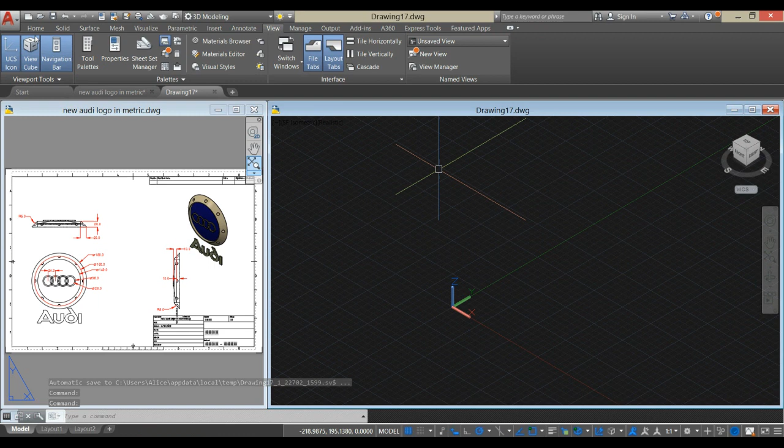Before we get started, make sure the setting on your status bar matches with mine and check these highlighted icons. And the template I'm using is acadiso3D for metric units. Let's start by bringing your drawing to front view. Type C for circle command, click anywhere on the screen, type D for diameter option, and enter 180 millimeters.

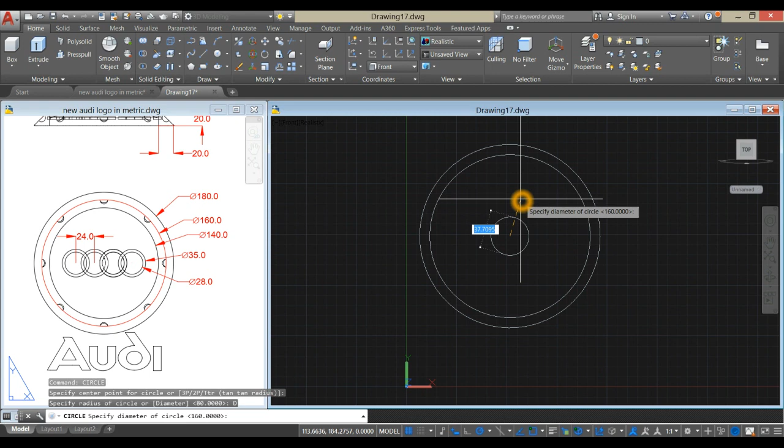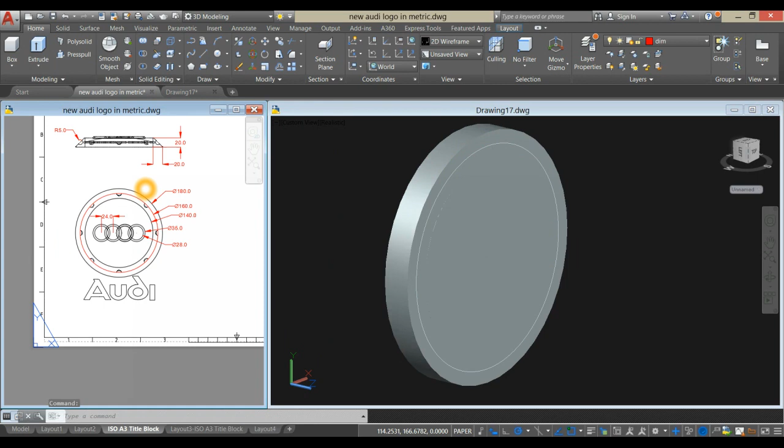The next circle, locate center, type D for diameter option, and enter 160. Right click to repeat circle, locate center, type D for diameter option, and enter 140 units. I'm just going to turn off the grid. Extrude these two circles. Go to the ribbon, select extrude command, and extrude it for 20 units, which is the thickness of this circle.

Select subtract command from the ribbon. Click the object you want to keep, right click and select that object inside to remove it. Go to solid, chamfer edge, and go down to the command window, click distance option, and the first distance is 20 units, enter, which is this one here, and the next distance, which is this one, is also 20, and select the edge, enter twice.

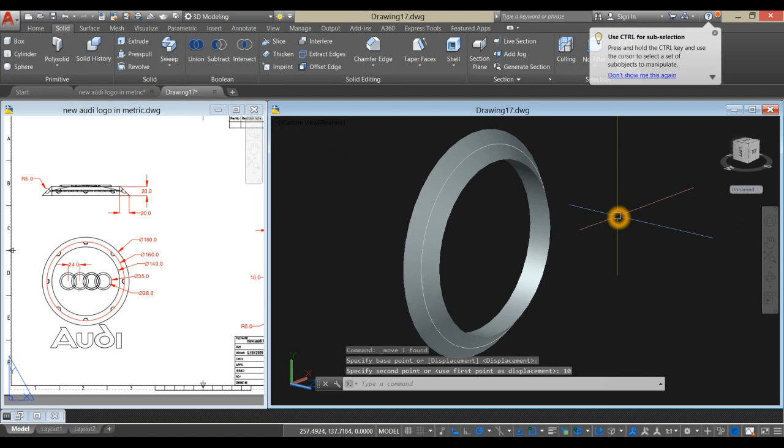Move this circle, which is our guide for creating the holes, move it for 10 units towards the center. Bring your drawing to front view. I'm just going to change this to wireframe. Select sphere from the ribbon, locate quadrant, and enter 5 for radius, which is this one here.

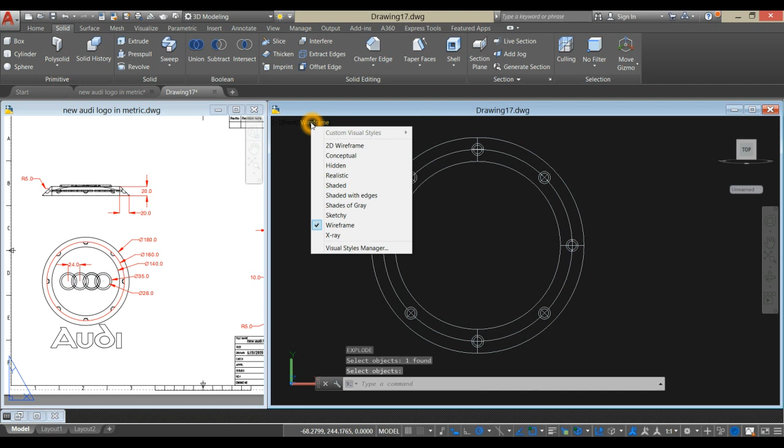Type array and select array polar. Click the object, specify center of array, go up to the ribbon and change the number of items to 8. Enter twice. I'm going to explode these spheres. Type X for explode command. I'm going to change this to shaded with edges. Go back to the ribbon again and select subtract command. Click the object you want to keep, right click, and select the spheres.

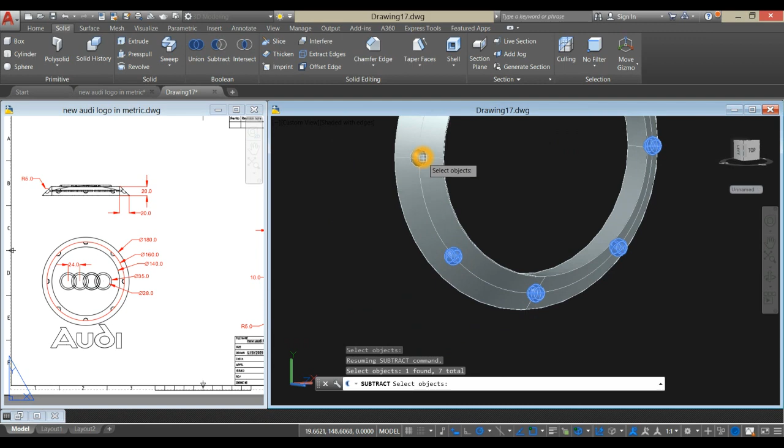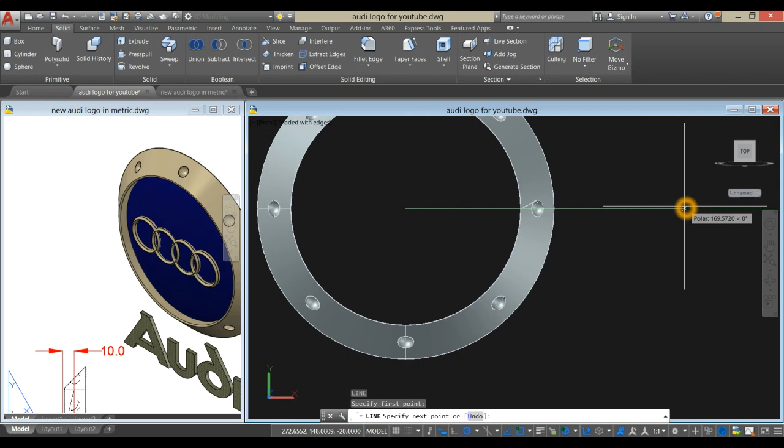The next thing to draw is this blue colored concave face. I'm just gonna bring this to front view and draw a line, maybe from here. It's just a guide so that my drawing won't be overlapping. I'm gonna hide this one, click, hover over isolate, and click hide object. Let's move on to the next one.

From front view, draw a line. Type L for line command. The distance is 140. I'm going to start from 70 and bring down your line for 140. I'm just gonna delete that. The distance from the midpoint of the arc perpendicular to the line is 10. So line again. From midpoint, bring your cursor to the right for 10 units. Go to the ribbon and select 3-point arc. Start from here.

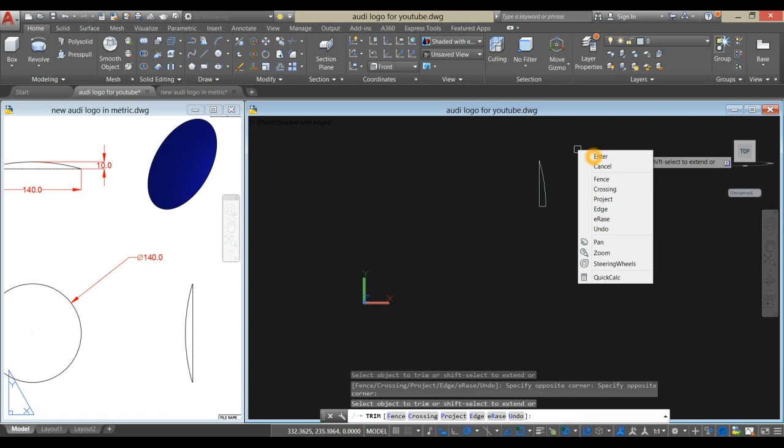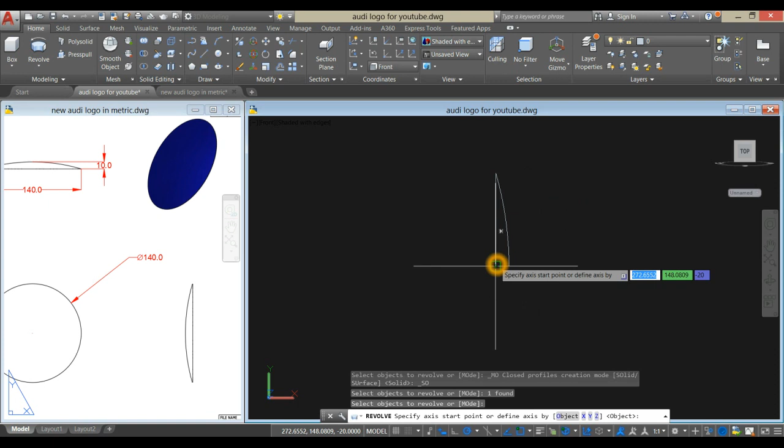Type TR for trim command. Double click and remove that. Type join command by typing J, enter, and select the segments. Now it's one object. Use revolve command. Click this object, enter, and start from that endpoint to this endpoint and enter 360 degrees.

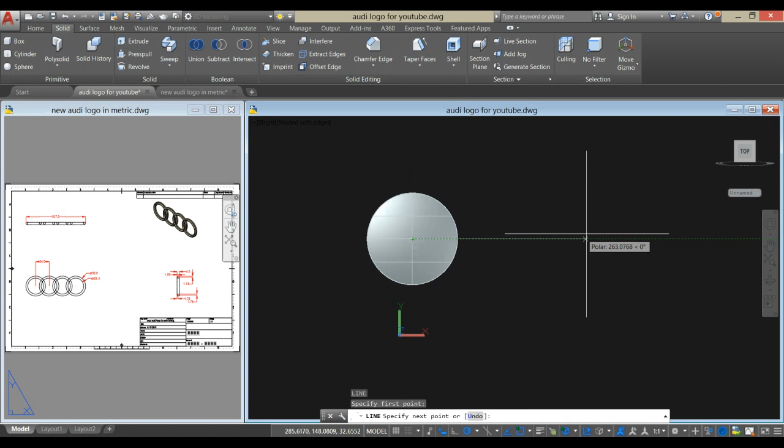Now let's move on to the next one, which is the circles. Draw a line again for guide. So type L for line command. And from the center, maybe about that distance, click this object, hover over isolate, and hide. Type C for circle command. Click the endpoint, type D for diameter option, and enter 35. Right click to repeat circle, D again for option, and enter 28. Just gonna erase that.

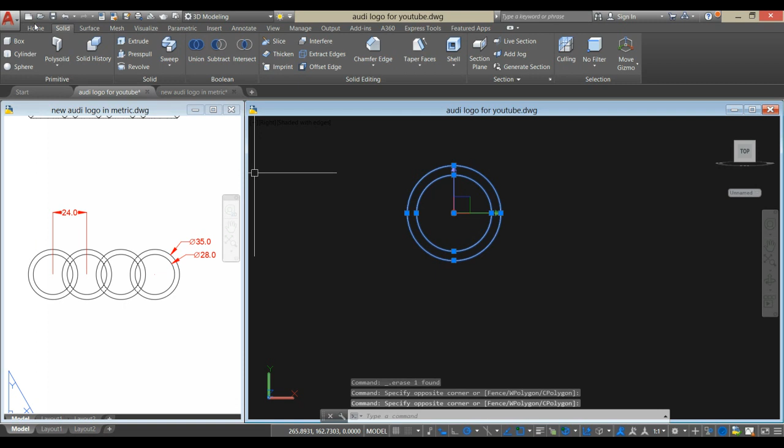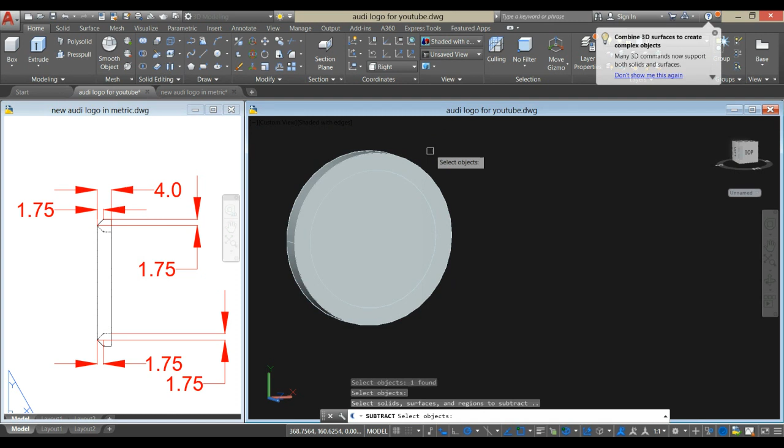Extrude these two circles for 4 units. Subtract command from the ribbon. Click the object you want to stay and click the object you want to remove. Go back to solid, select chamfer edge, and the distance of the chamfer is 1.75 by 1.75. So select first distance from the command window and enter 1.75. Enter and 1.75 again. Click this edge. Enter twice. Right click to repeat chamfer edge and click this edge here.

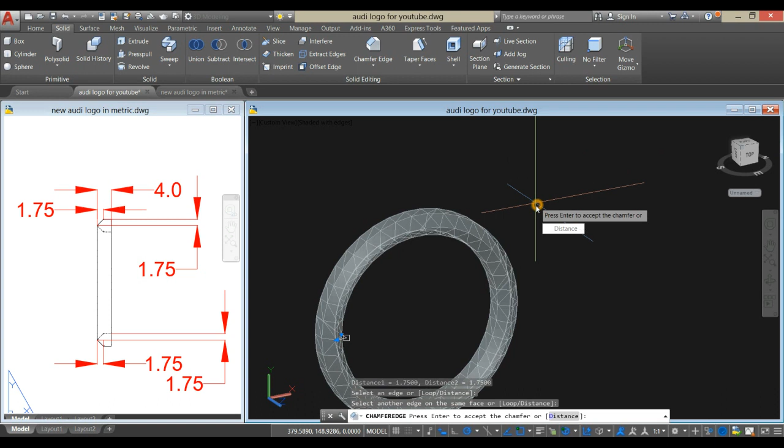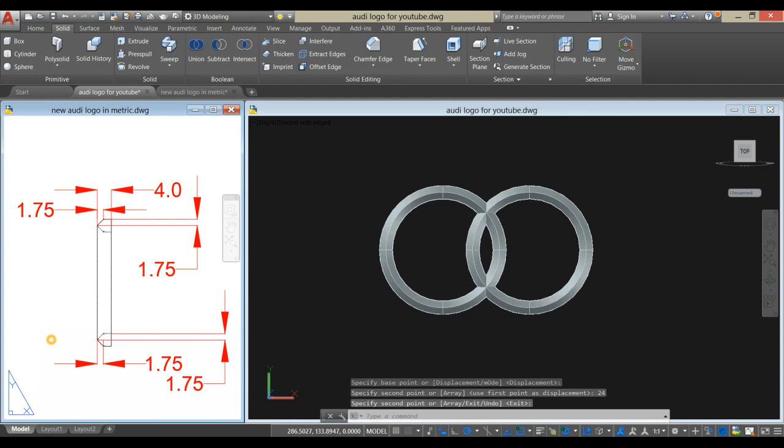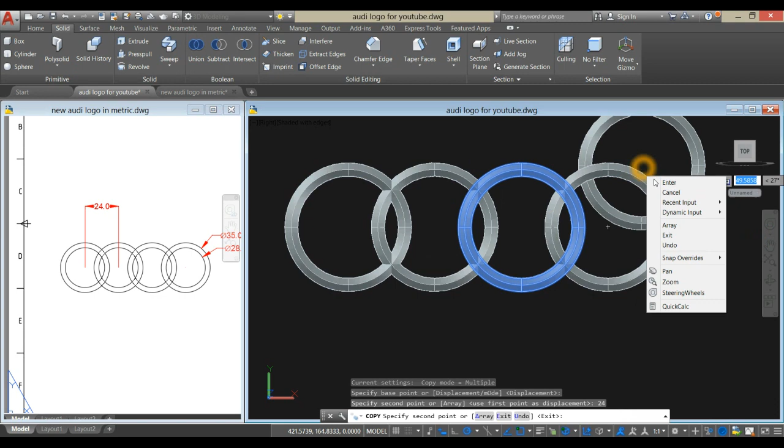Alright, bring this to right view. Copy. And from the center for 24 units, which is this one here. Copy again for 24. And 24. Now our circles are done. The next step to do is the 3D font.

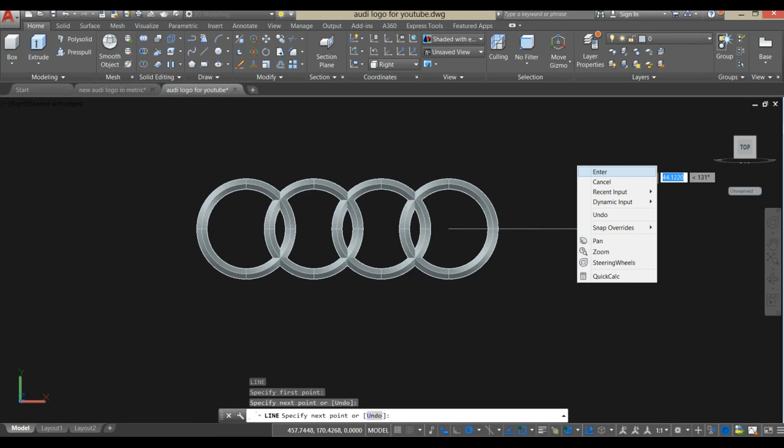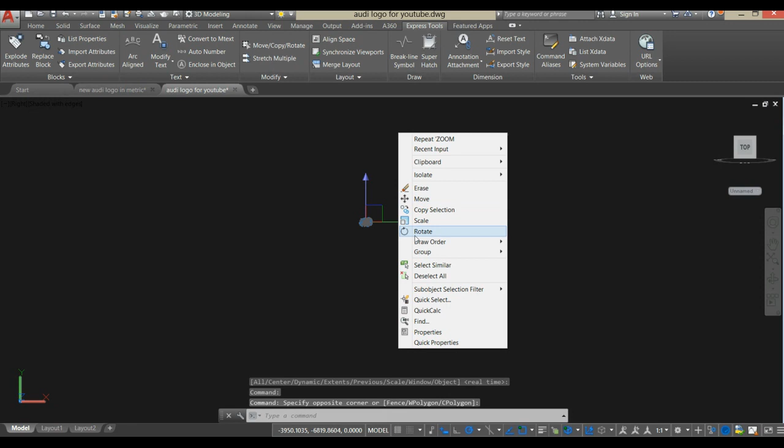Type L for line command. Hide these circles, isolate, and hide objects. Go to annotate, select multiline text, and type AUDI. Go to Express Tools, and beside Modify Text, click this drop-down arrow and select Explode. Select Zoom Extents and look for that exploded text. Move it back. I don't know why it moved somewhere else.

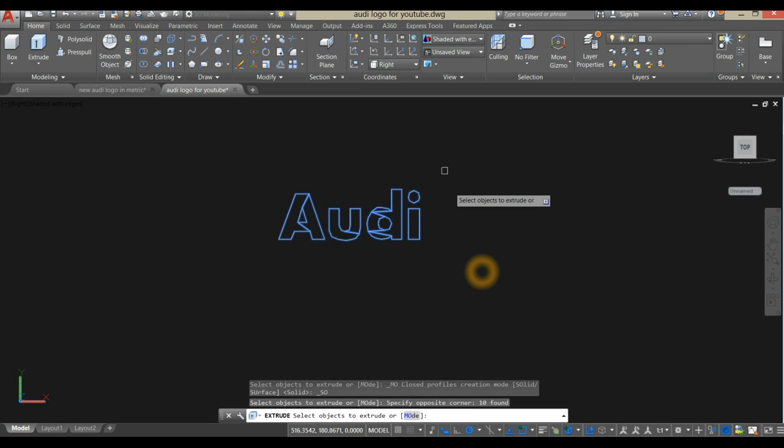And move it near the guide. I'm just gonna erase this one. Go to home, extrude the text for about 5 units. Now I'm gonna combine all the text. Now it's one object. Right click, hover over isolate, and end object isolation. The next step is to combine all the parts.

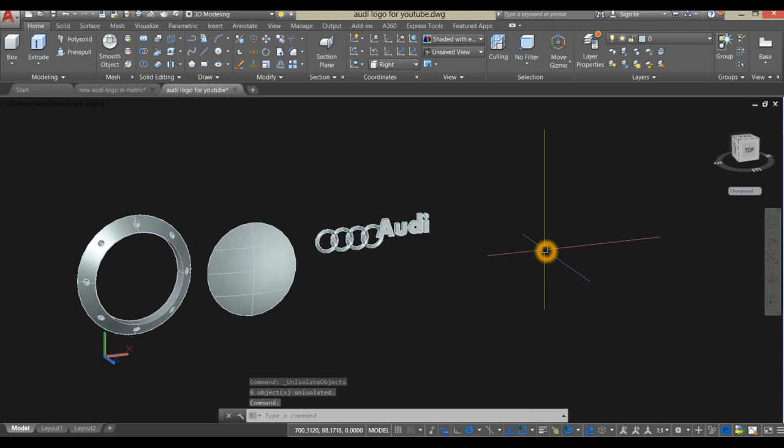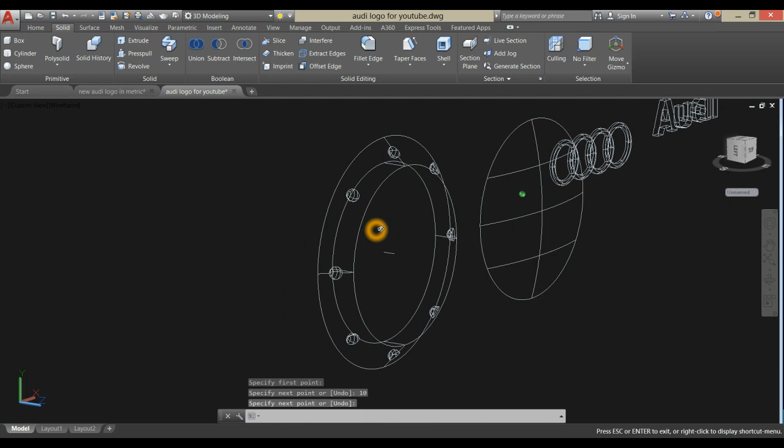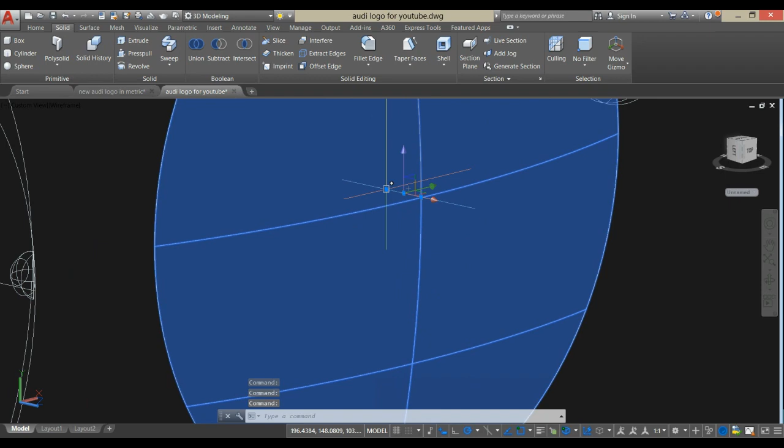I'm going to change the visual style to wireframe. And draw a line as a guide from the back of this drawing towards the center for 10 units. And attach another line from the center of this hemispherical shape towards the center for another 10 units. I'm gonna grab this one, including that guide, move it from the end point to the end point here.

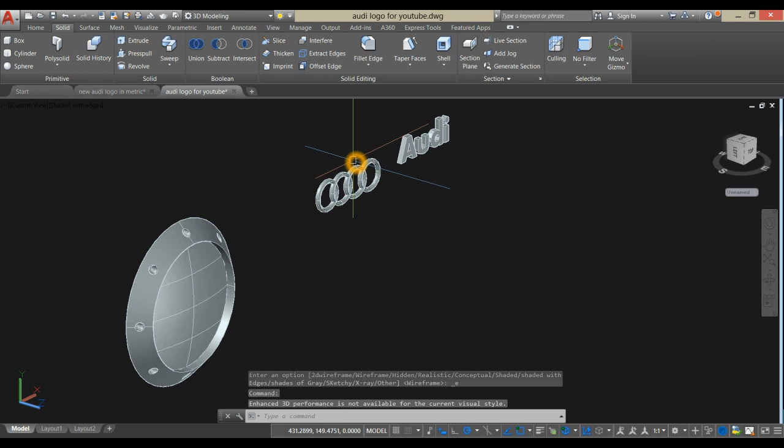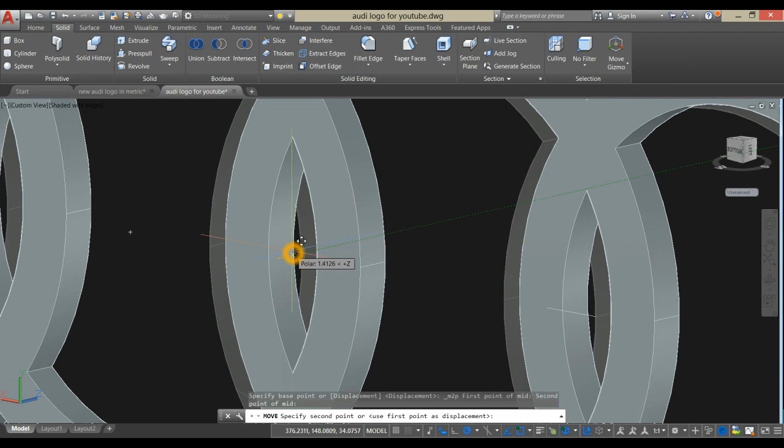I'm gonna check it with shaded with edges. Looks okay. Now I'm gonna combine all these 4 circles by using union command. Now it's one object. I'm gonna move this one, shift right click, mid between 2 points. I'm gonna grab the midpoint from these 2 points and attach it to the end point of that line. Just gonna erase that. I'm gonna move this text at the bottom, left view, no, maybe front.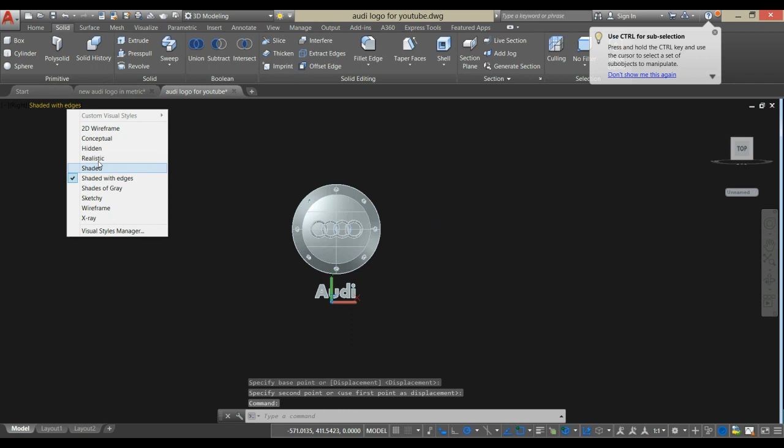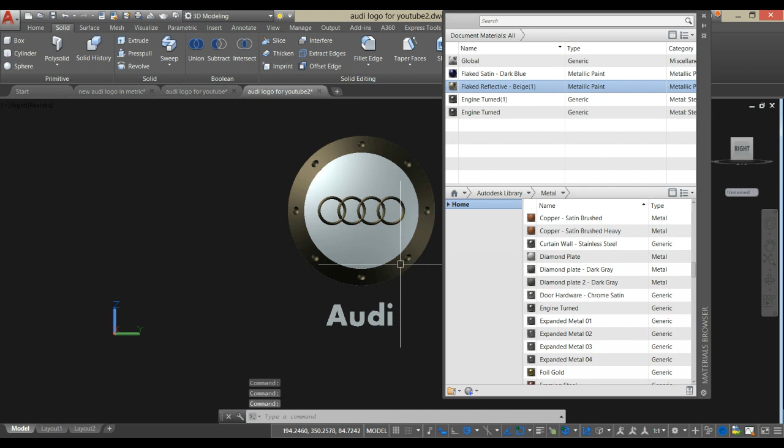Change this to realistic. The next thing to do is to apply materials. Type materials. Apply flaked reflective beige for this one too. This one for flaked satin dark blue, and this one for engine turned.

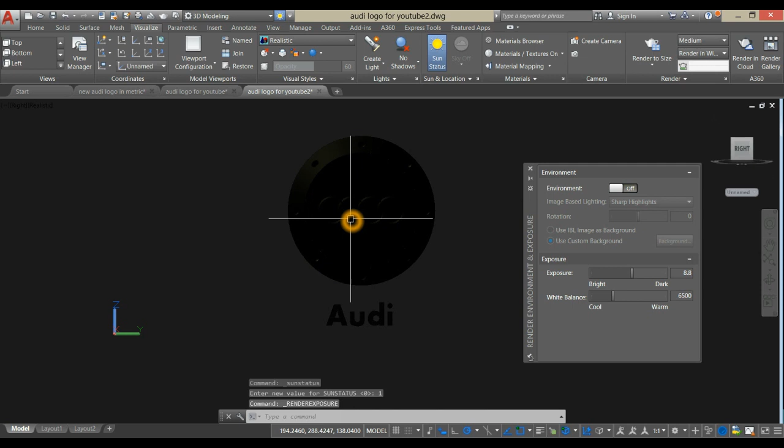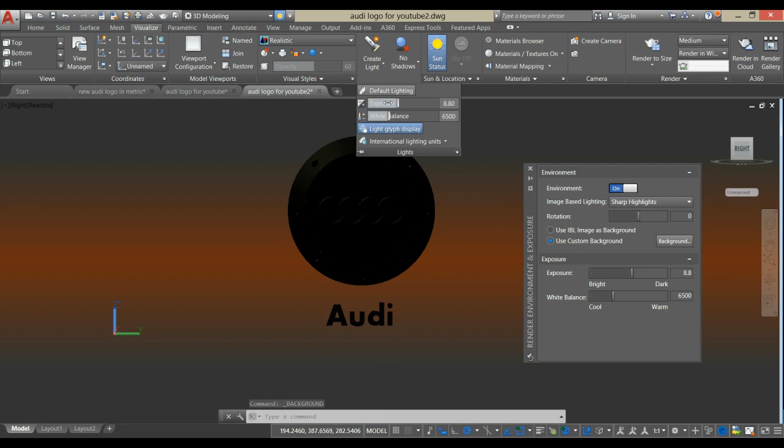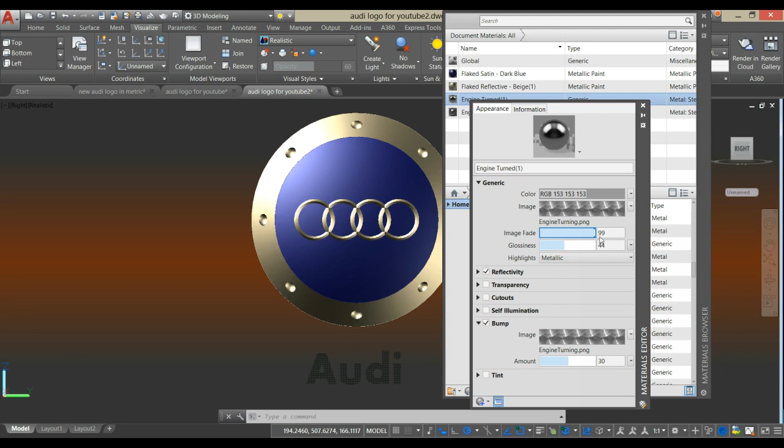Go to visualize, lighting, turn that off, adjust exposure setting, turn on environment, click this button, use custom background, click background button, select gradient, 3 colors, darker for top one, click OK, adjust exposure, bring back materials. I'm gonna adjust the image for the text. Okay.

And then go to solid, fillet edge, click radius from the command window and enter 1. Select this outer edge and this one, enter twice.

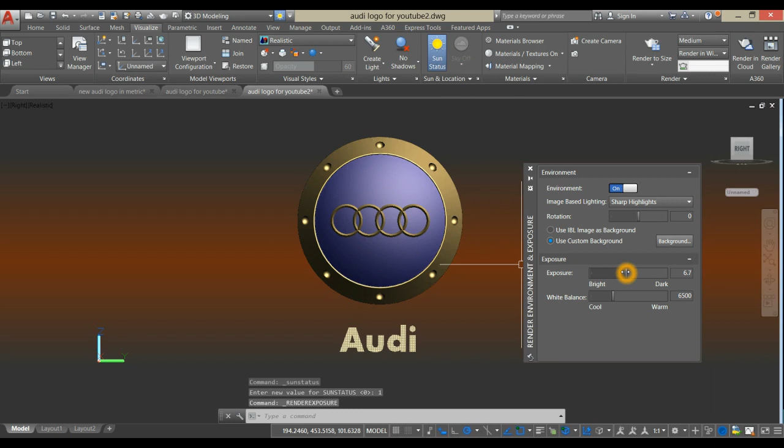All right, type JPG out and save this as new AUDI logo. Save. Open this one. Maybe we can use photo gallery.

I'm just gonna crop this one. I could use snipping tool. Select rectangular snip. Maybe about that size. Save as. Crop. Logo. Let's open it again. Can use photo gallery. And here you go. We're done.